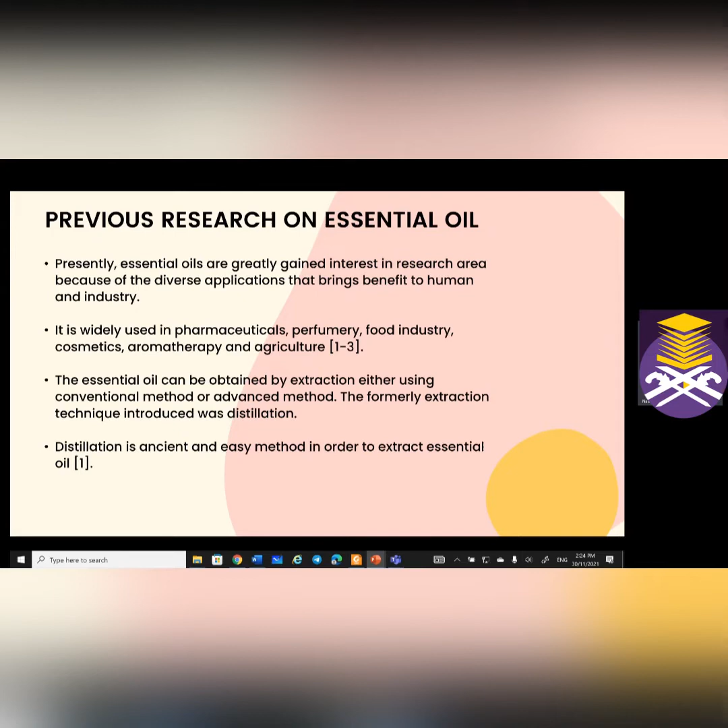Distillation is an ancient and easy method to extract essential oil. Therefore, distillation is categorized as a conventional extraction that can be accomplished by using hydro or steam distillation. Okay, this is the previous research on temperature control effort.

In extracting essential oils, there are parameters that have to be considered which may affect the yield and also the quality of the pure essential oil. Those parameters are pressure, distillation time, composition of chemical substances, and the size of the raw material. However, temperature is the most critical parameter that will affect the quality of oils.

Temperature is difficult to handle and control since it exhibits non-linear behavior, and moreover, mostly the extraction process was operated under little or no supervision to monitor or control the temperature during extraction. Therefore, in this study, temperature control is important in extraction and it is chosen as the process variable for the proposed research.

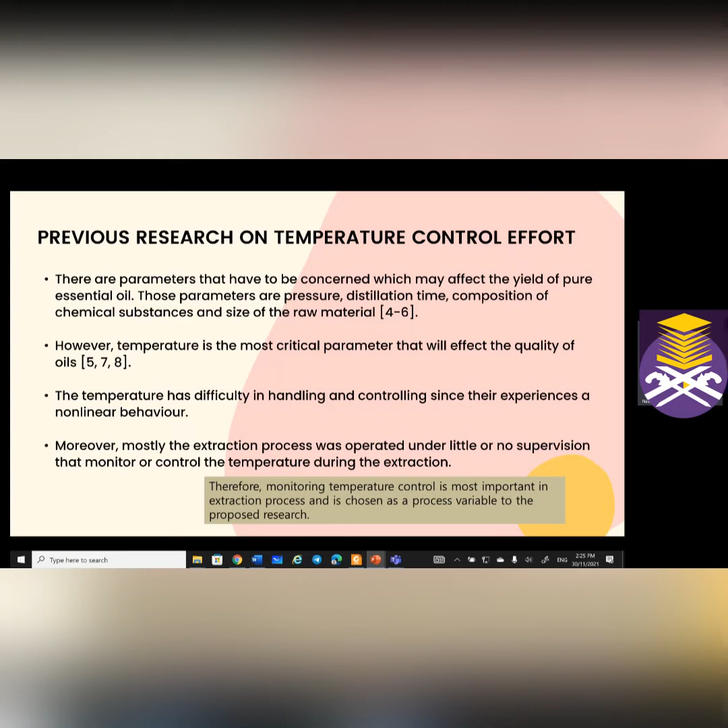Okay, this is the previous research on control strategy. In this study, we are focusing on the PID controller and fuzzy logic controller. The PID controller is of most interest and has sustained its popularity because of its simplicity and understandable control action. But unfortunately, PID control has some drawbacks, being unable to control processes with large constraints.

Therefore, advanced controllers have been applied to enhance the conventional controller, like the fuzzy logic controller, self-tuning fuzzy PID, model predictive control, and other advanced control techniques. The fuzzy logic controller is an intelligent control strategy that applies linguistic rules, with advantages such as not requiring a mathematical model structure and being able to handle non-linear processes.

Nevertheless, the fuzzy logic controller has some drawbacks where tuning is done manually based on trial and error, and eventually it is time consuming. Therefore, self-tuning fuzzy PID can further simplify this problem. Self-tuning fuzzy PID is an adaptive control where the PID parameters, Kp, Ki, and Kd, are tuned automatically. The fuzzy control acts as a supervisor, always attempting to tune the PID properly.

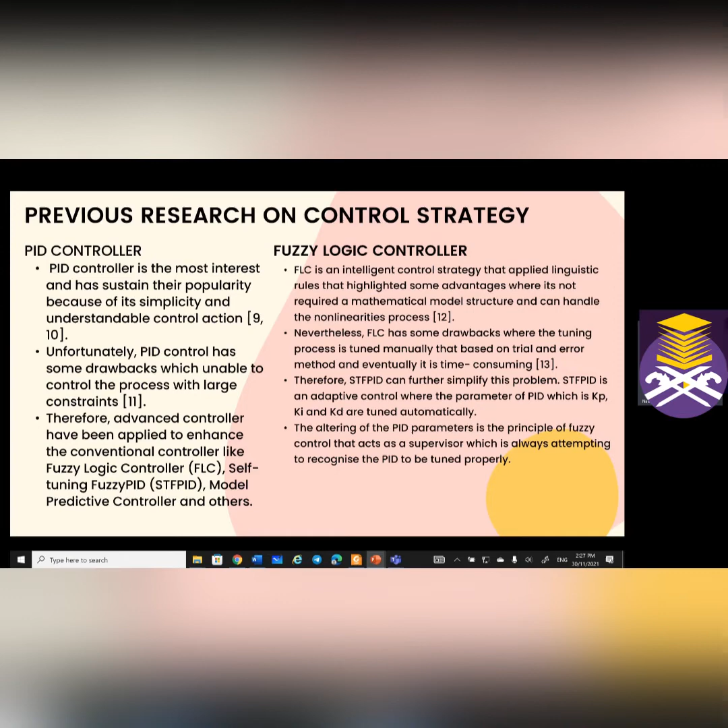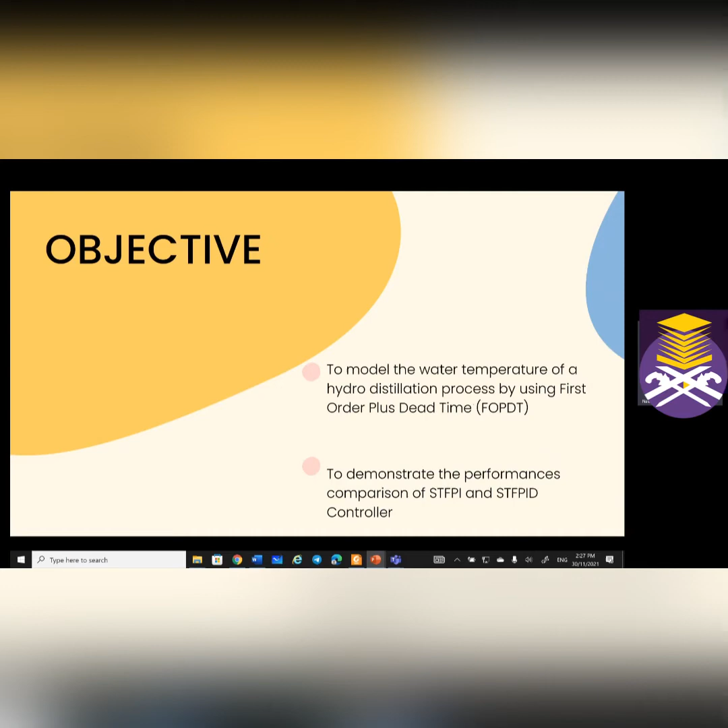So in this study, the objective is to model the water temperature of a hydrodistillation process by using a first order plus dead time, FOPDT, model, and to demonstrate the performance comparison of self-tuning fuzzy PI and self-tuning fuzzy PID controllers.

The background of this study was that an FOPDT model will be constructed to represent the compact hydrodistillation process, and then the PID parameters are acquired to design the self-tuning fuzzy PI and self-tuning fuzzy PID controllers. Moreover, the performance of STFPI and STFPID with 25 and 49 fuzzy rules will be compared.

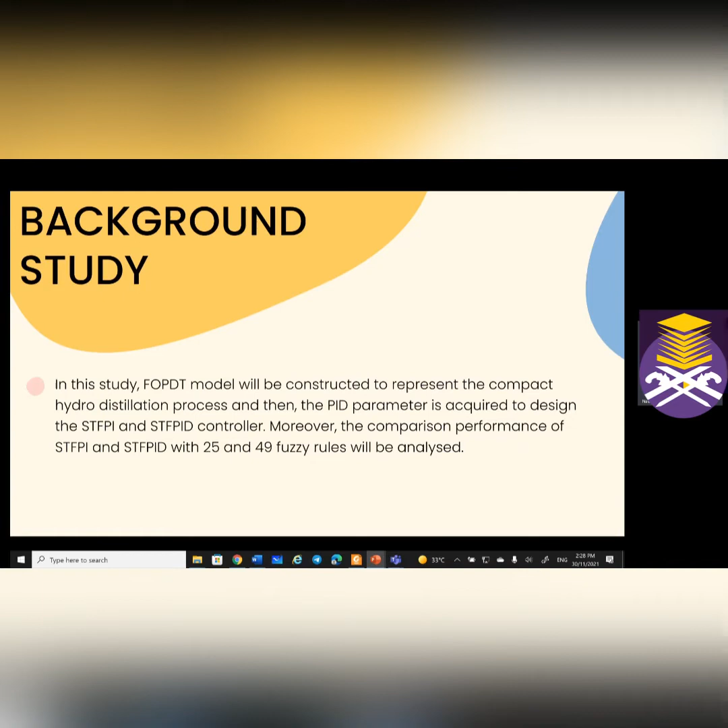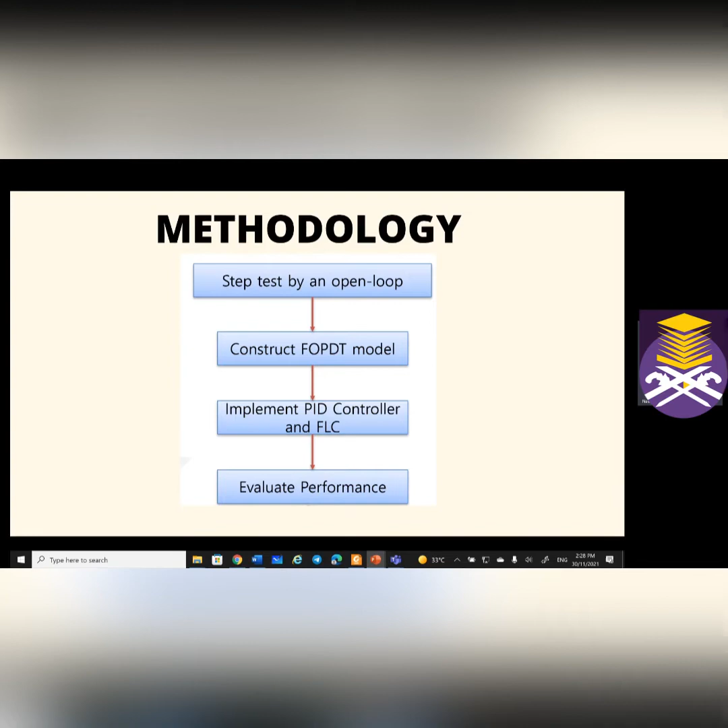So this is the methodology involved in this study. The first step is doing a step test by an open loop experiment, then constructing the FOPDT model, then implementing the PID controller and fuzzy logic, and lastly evaluating the performance based on transient response.

As you can see, figure 2A is the output response of an open loop test, and B is the step input signal. In this study, the open loop experiment has been done with a 3-volt step input signal. There was a spike at 2000 and 2200 seconds. This happened because of the high pressure that forced the pressure to be released.

From this open loop experiment, the FOPDT model is developed by using the process reaction curve. The process reaction curve was used to obtain the FOPDT model using the 2-point method, at 28% and 63%. From the process reaction curve, the time constant, time delay, and gain were obtained, and the FOPDT model was obtained.

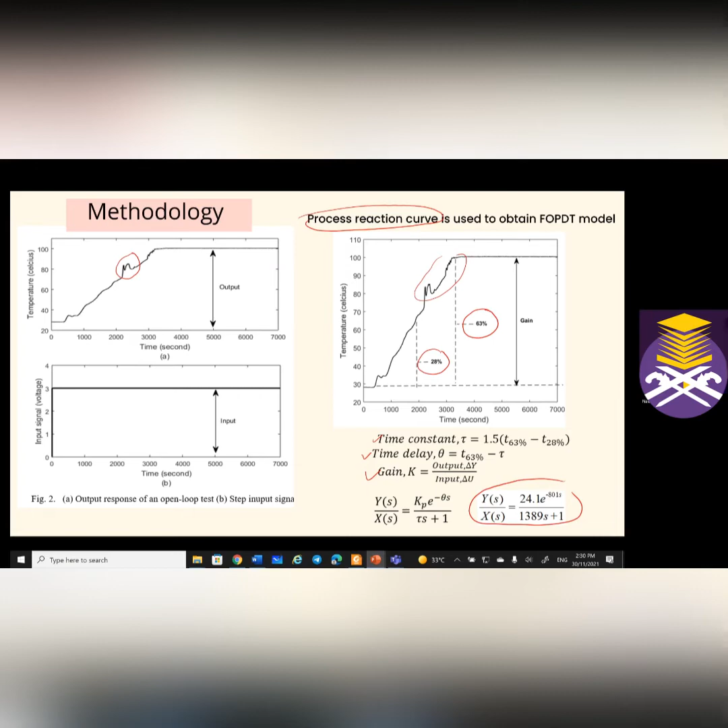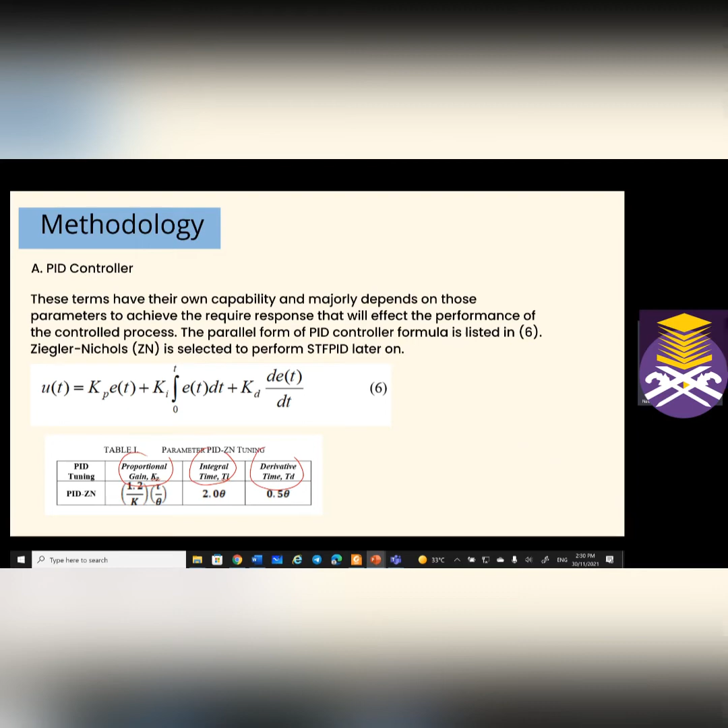In this study, the parallel form of the PID controller has been used, as listed in equation 6, and Ziegler-Nichols is selected to perform STFPID and also STFPI later on.

Okay, this one is the self-tuning fuzzy PID controller. In designing the STFPID, there are 2 inputs involved, which are error and also derivative of error, whereas the outputs are KP, KI, and also KD. This controller is attempting to tune each parameter of the PID.

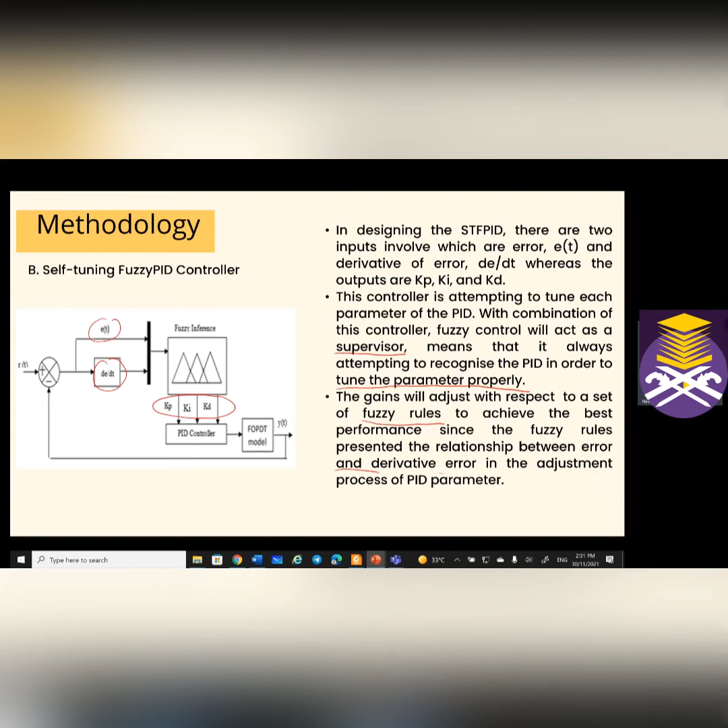With combination of this controller, fuzzy control will act as a supervisor, meaning that it is always attempting to recognize the PID in order to tune the parameters properly. The gain will adjust with respect to a set of fuzzy rules to achieve the best performance, since the fuzzy rules represent the relationship between error and the derivative of error in the adjustment process of PID parameters.

As you can see here, figure 5 and figure 6 depict the 7 times 7 and 5 times 5 membership functions of the input fuzzy set for the error respectively. Here the range is set to -100 to 100 as it represents the full scale of the water temperature.

So the notation of the membership function, as you can see here, NB, NM, NS, ZE, PS, PM, PB refers to negative big, negative medium, negative small, zero, positive small, positive medium, positive big.

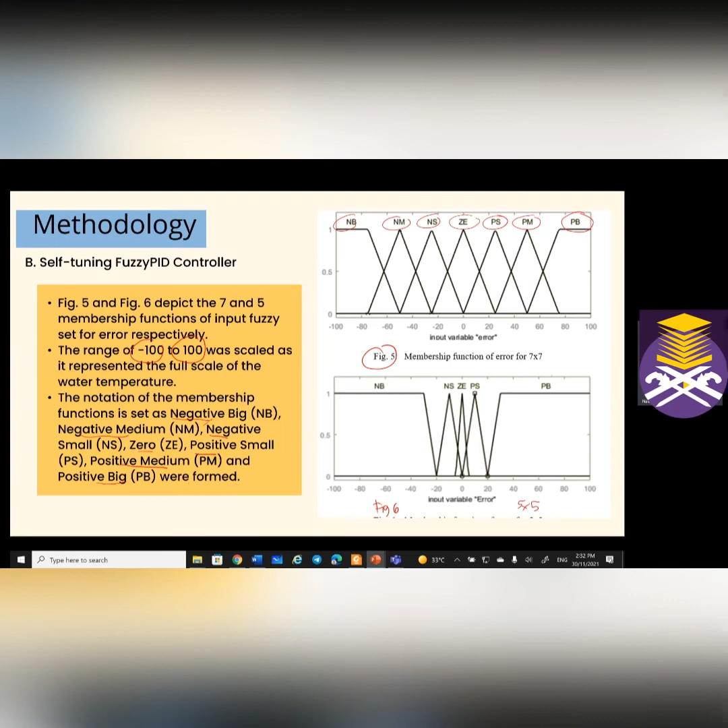And here the same goes for the derivative error for 7 times 7 and 5 times 5. The range is -15 to 15 because it is used to eliminate the unwanted noise and fluctuation that generally occur in temperature process control.

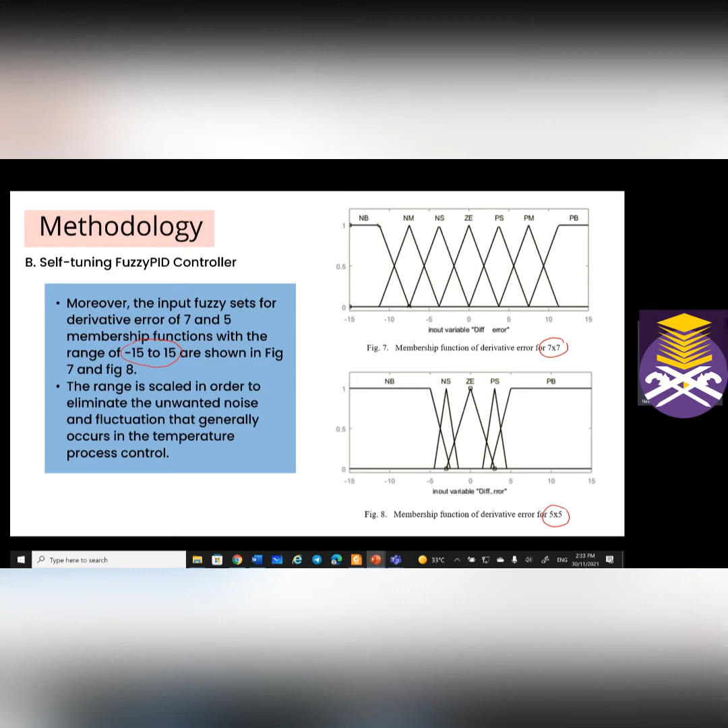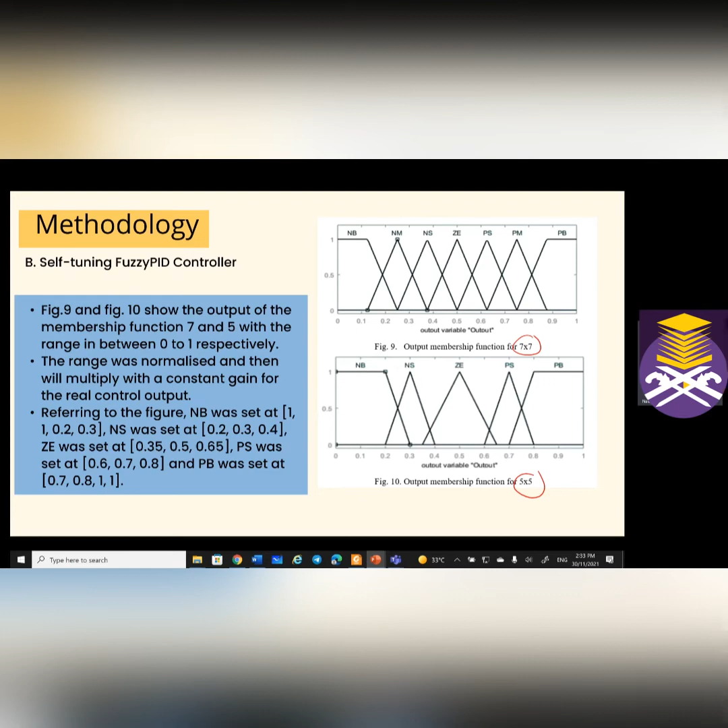This is for the output membership function, for 7 times 7 and 5 times 5. The range was normalized and then multiplied with a constant gain for the real control output.

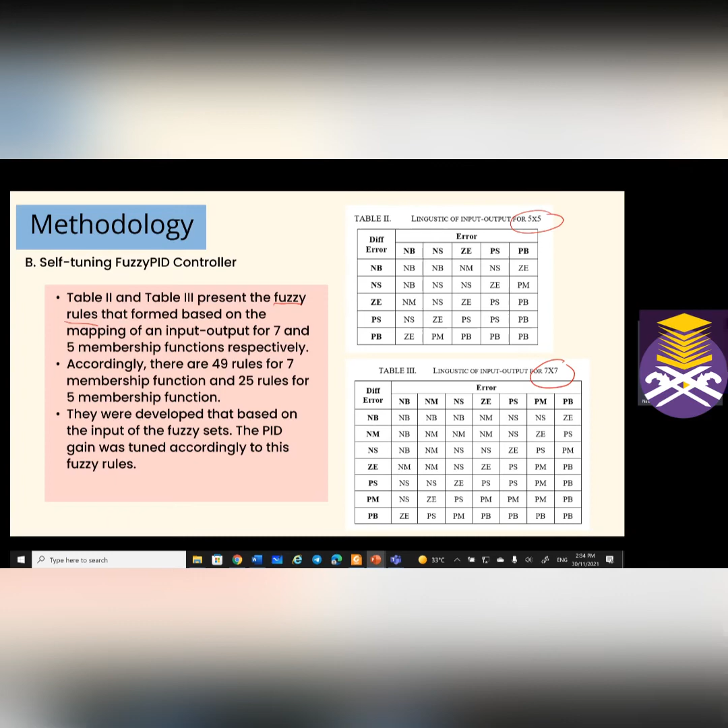Next is the table for fuzzy rules, based on the mapping of input and output of the membership functions respectively. Accordingly, there are 49 rules for 7 times 7 and 25 rules for 5 membership functions. They were developed based on the input of the fuzzy set, and the PID gain was tuned according to these fuzzy rules.

This part is for results. So for results we have three tests, which are the step test, set point change test, and load disturbance test. So look at the step test result. As you can see here, the fuzzy PID membership function successfully performed for all transient response criteria. And for the rise time, it showed that the self-tuning fuzzy PID and PI are not much different, around +2, +4.

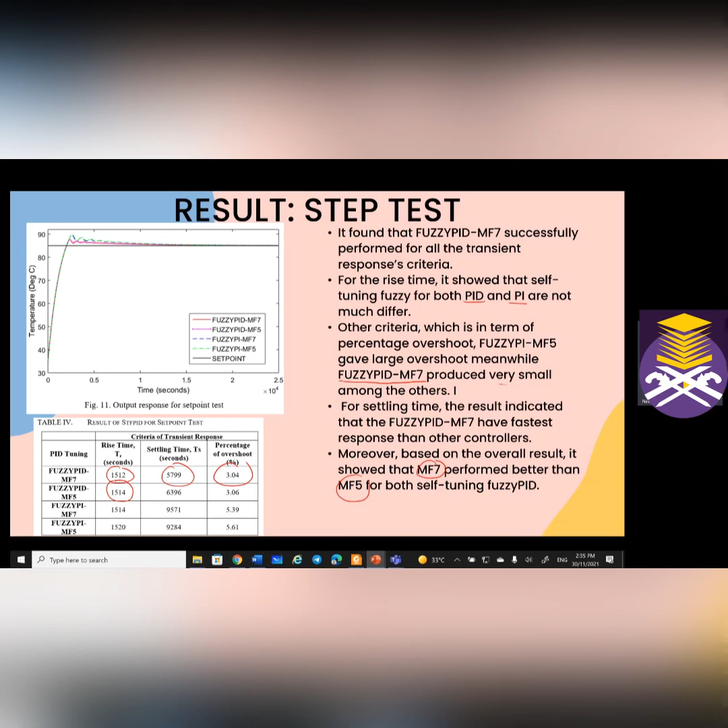Another criterion is percentage overshoot. Fuzzy PI membership function 5 gives large overshoot, meanwhile fuzzy PID membership function 7 produces very small overshoot among the other controllers. For settling time, the result indicates that fuzzy PID membership function has faster response than the other controllers. So overall, membership function 7 performs better than membership function 5 for both self-tuning fuzzy PID.

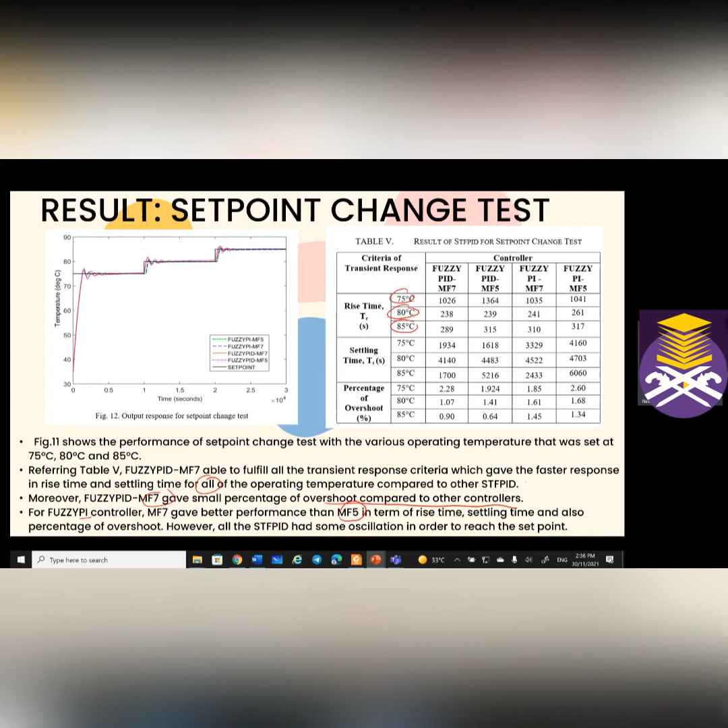For the fuzzy PI controller, membership function 7 gives better performance than membership function 5 in terms of rise time, settling time, and percentage of overshoot. However, all the self-tuning fuzzy PID had some oscillation in order to reach the set point.

For the last result is the load disturbance test. The load disturbance test has been done to test the potential of each controller to return to the set point, and the recovery time indicates which controller managed to reach the set point after experiencing the load disturbance. As you can see here, the load disturbance was performed right after the system reached the set point and steady state condition at 85 degrees Celsius, around 2000 seconds.

From the result obtained, it showed that fuzzy PID membership function 7 was able to reach the set point back after undergoing the load disturbance. Moreover, fuzzy PI membership function 5 took the longest time to reach the set point.

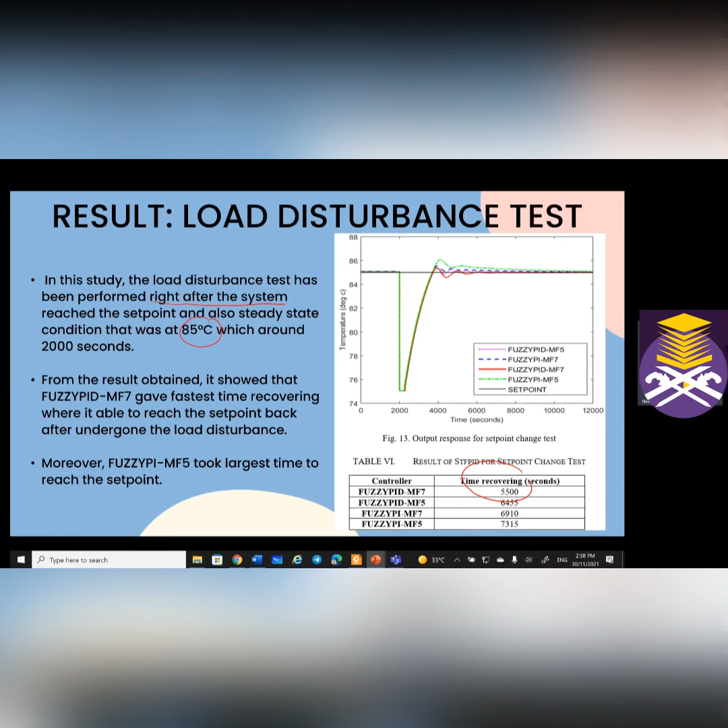For the conclusion, the fuzzy PID controller based on the FOPDT model for compact hydro distillation was presented, and this study analyzed the performance of self-tuning fuzzy PID controller for 7 and 5 membership functions. The performance was evaluated based on transient response, which is rise time, settling time, and percentage of overshoot.

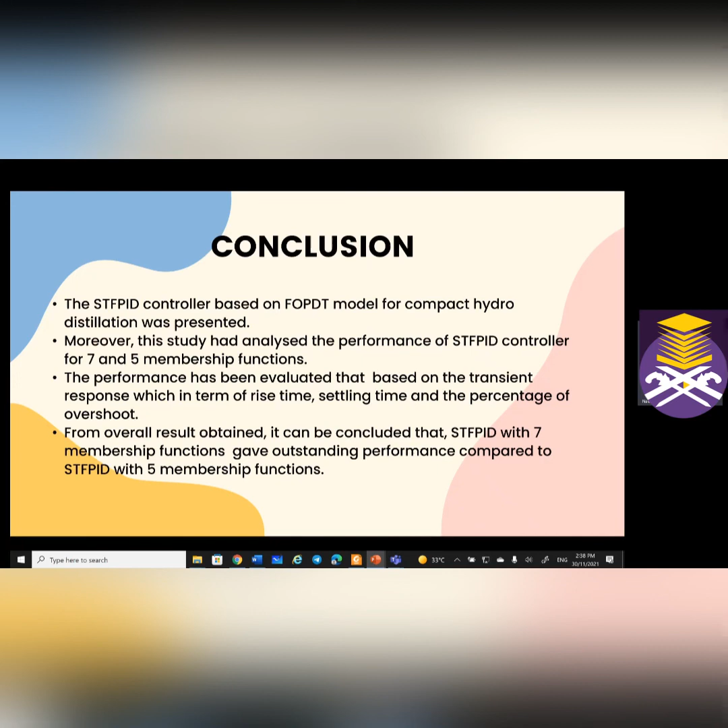From the overall result obtained, it can be concluded that self-tuning fuzzy PID with 7 membership functions gave outstanding performance compared to STF PID with 5 membership functions, and the same goes for self-tuning fuzzy PI with 7 membership functions, which gave outstanding performance compared to self-tuning fuzzy PI with 5 membership functions.